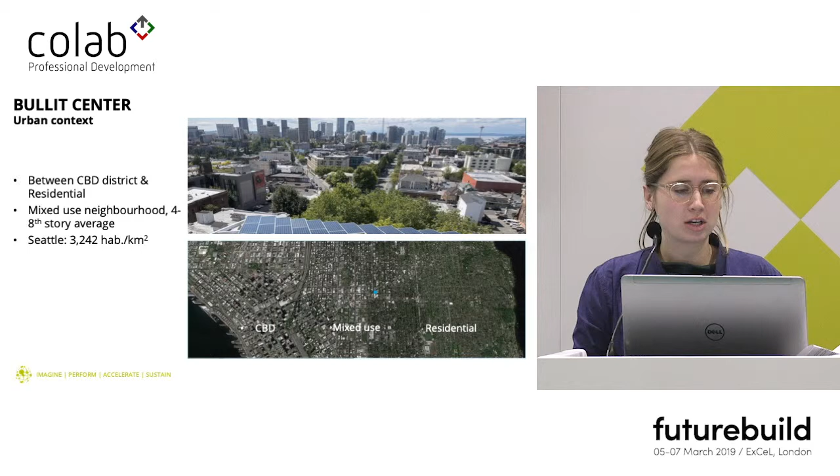Hi, I'm Louise Hamot, working at Elementa, and I'm going to talk about the Bullitt Center, which is a commercial building in Seattle, finished in 2013, and situated in the middle of Seattle in a semi-dense urban context, I would say.

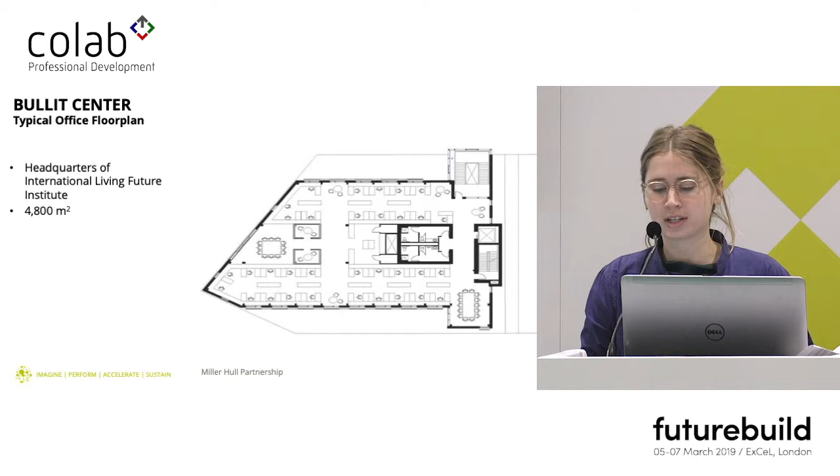It hosts the headquarters of the International Living Future Institute and other tenants. It's mostly offices, but the first 2 floors are for educational purposes concerning living buildings. It is actually full Living Building certified, said to be the greenest office building in the world, at least one of the highest living buildings.

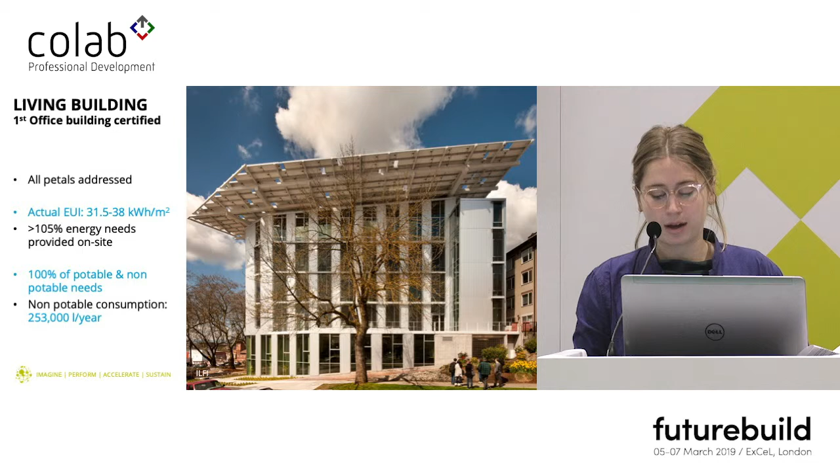And I will highlight some of the petals it addressed, and I would like to start with the fact that it's achieving net positive energy and net zero water. And you can see that actually the EUI and the water consumption for this building are pretty low. Concerning the energy use intensity, compared to an average commercial American building, it is actually 83% lower, and the actual performance is lower than the predicted one.

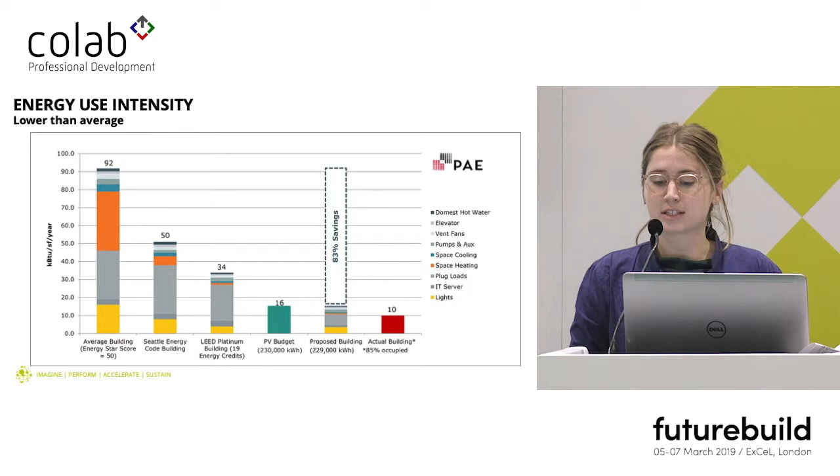This can be verified through constant monitoring, which takes place inside the building, and you can find this information on the website. And as Martin said, certification is based on actual performance and not modeling and predictions.

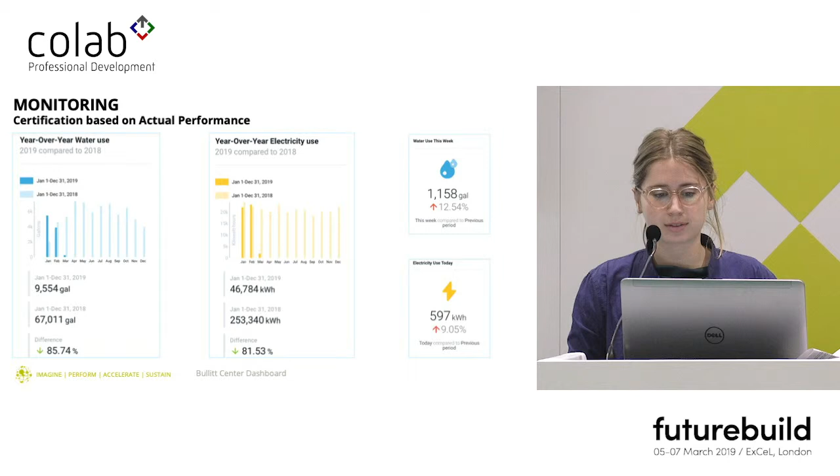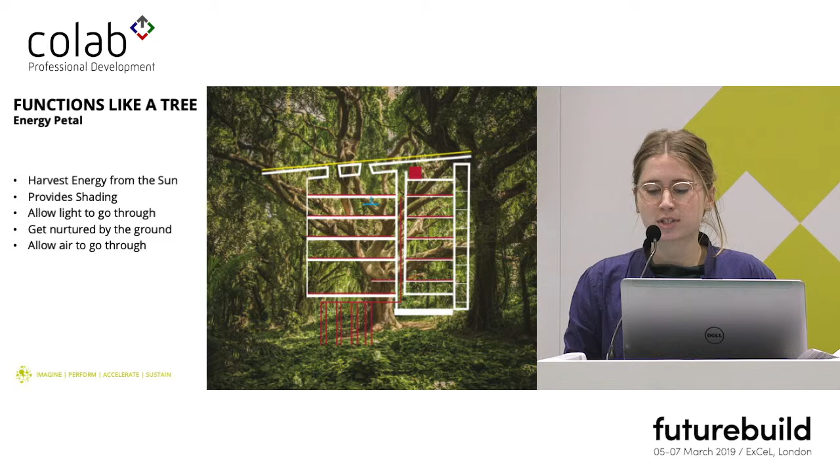So if we look at the energy petal and how the building actually achieves net positive energy as it is required, the better way to explain it is to compare it to how a tree works. Like a tree, it harvests energy from the sun through PVs, and the PVs have been laid out to maximize yield during summertime, because in the summer it gets very, very sunny, a lot more sunny than in the rest of the year, and they found out that was the biggest yield.

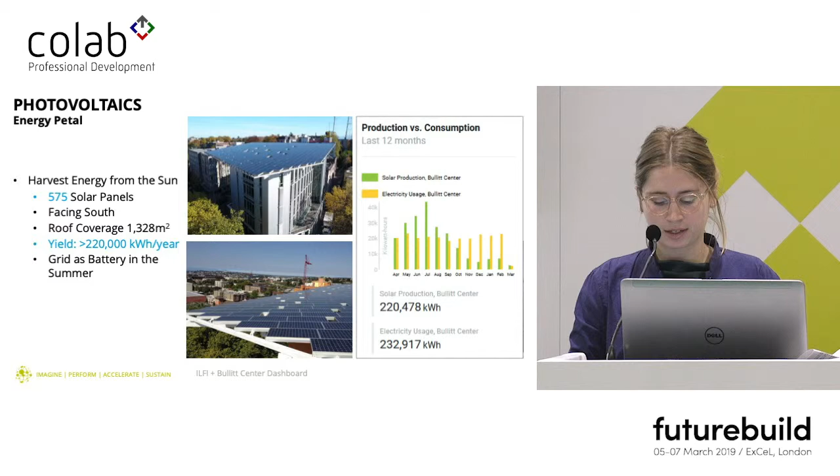And therefore the grid is used as a battery. The surplus in the summer goes into the grid, and they get it back in the winter. You can tell that the roof area creates a large canopy and exceeds the footprint, and it's something they actually had to change the building regulation for, because it was not allowed by Seattle.

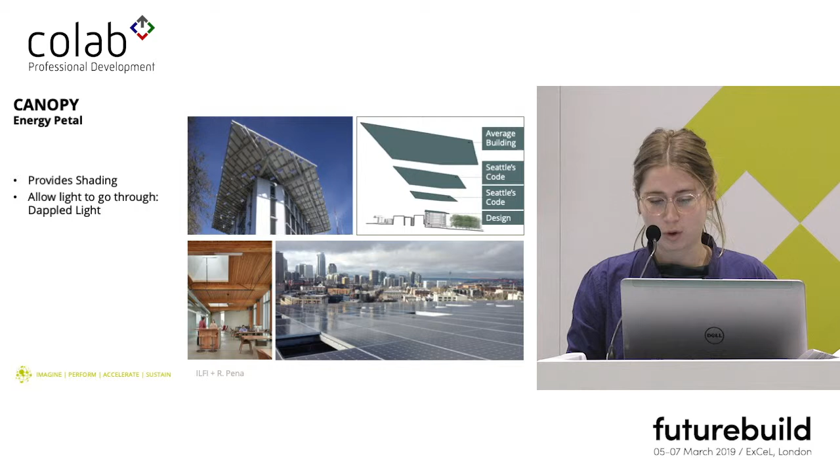And it provides shading, but also it allows light to go through a series of holes, and also inside through skylights. And you can see that if it had been an average commercial building, the roof area would have been much bigger. So it was also made possible because they reduced the overall consumption through a lot of different strategies, and I would just mention a few of them.

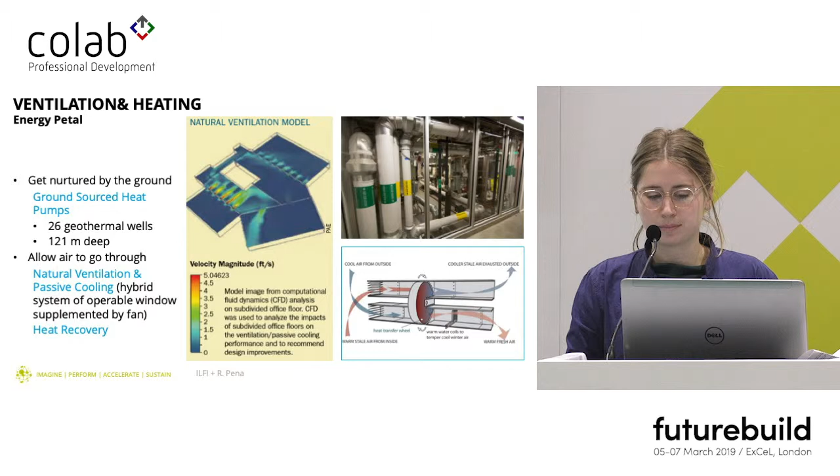So it has geothermal heating and natural ventilation and passive cooling with a system of operable windows. We can do night purge in the summers or just adapt according to the inside temperature, and there is a heat recovery system. And there is obviously good insulation and other strategies of that kind.

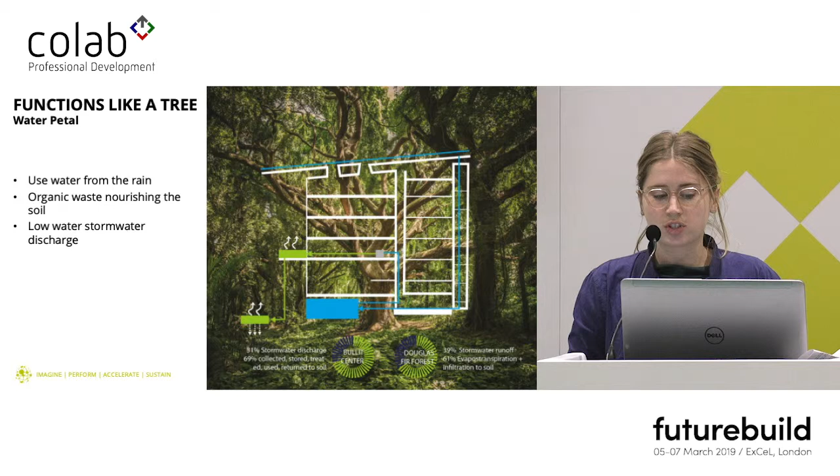Concerning the water management, maybe the best analogy is to compare it to a forest. So if you compare it to a Douglas fir forest, the proportion of stormwater discharge and water treated that goes back into the air and the soil is actually pretty similar. So 31% stormwater discharge for the Bullitt Center and 39% for a Douglas fir forest.

So it gets all its water needs from rainwater harvesting for potable and non-potable needs. The potable use is actually a recent achievement. It's allowed since November. Unfortunately, they had to use chlorine. They really fought against it, but the local authorities wouldn't let it go. But it was still a big achievement because it was not allowed at first.

And concerning non-potable water, it's harvested through the big canopy, the big roof, and it goes into a big cistern which is pretty large, but it's due to the fact that, again, in the summer it doesn't rain at all, so you have to compensate for this. And in the rest of the year it rains awfully a lot, more than in London.

And also net zero water is made possible because of low water consumption. And one of the key aspects is the toilets. It uses composting toilets, and it's the highest building with composting toilets in the world. And with this foam technology, it actually saves 96% of water, because it only uses 2 tablespoons of water mixed with a biodegradable soap.

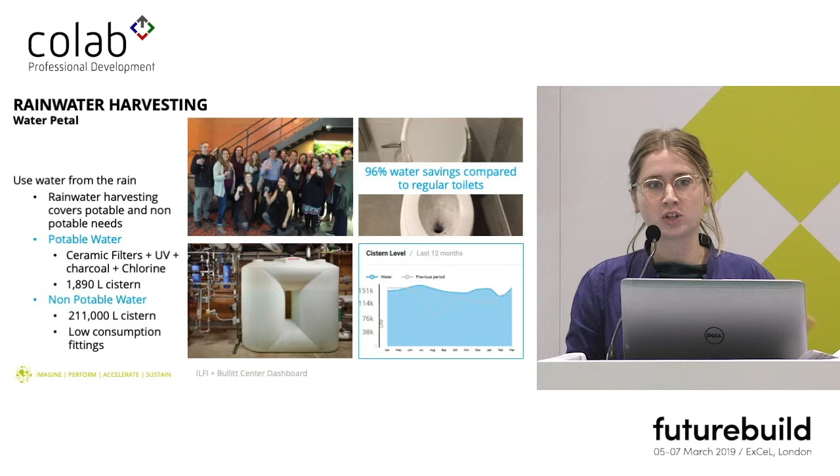Then it goes into the soil digesters that transform the black water into a fertilizer, CO2 that goes through the heat recovery, and leachate that goes to a facility.

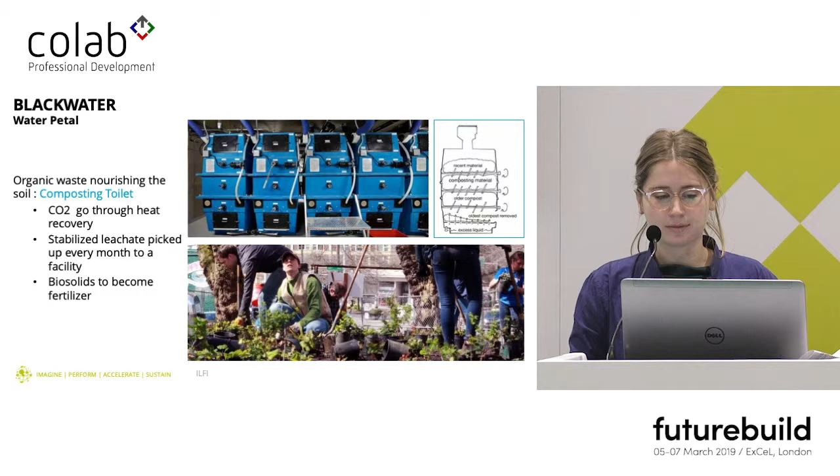And finally, concerning the grey water management, the water goes through constructed wetlands built on one of the green roofs, and it's treated through plants like horsetail, which thrive well in Seattle. And it runs several times before going to an infiltration planter in the little park we can see in front of the building. This park did not exist before.

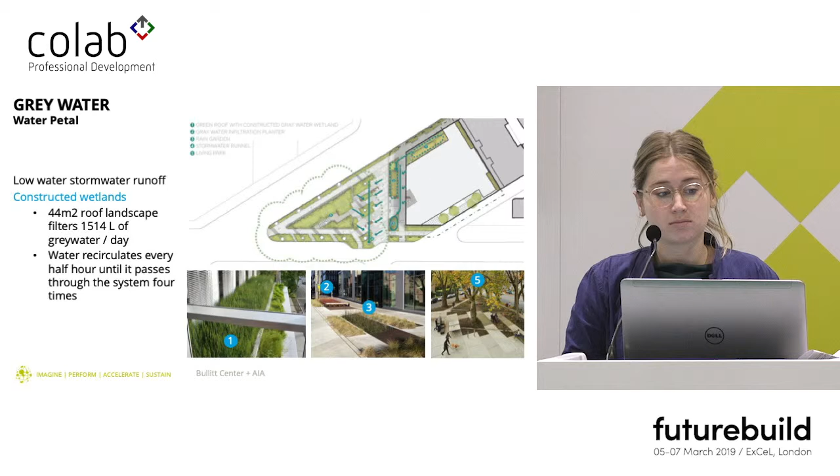It was a very dangerous road intersection, and the team managed to convince the city to change it into a public garden, and it also became part of the grey water management system.

Martin talked a bit about the healthy materials. They also had to address this, so using only Red List free materials, some salvaged wood beams. All wood is FSC certified and comes from 1,000 kilometers around. For here that seems a lot, but for the States it's pretty nice. And you can really feel inside that the materials are really healthy, and it's very pleasant actually to be inside.

And a final aspect I would like to highlight, to really show that sustainability design is not just about energy and water efficiency. One of the best places to hang out in this building is actually the staircase, because it was designed with the best view, where you have a beautiful view over the Olympics, and it was intentionally made large so people can hang out.

And also worth mentioning that there is no parking space, which in the States is not the usual trend, except in New York. And 75% of occupants are estimated to use public transport or walking.

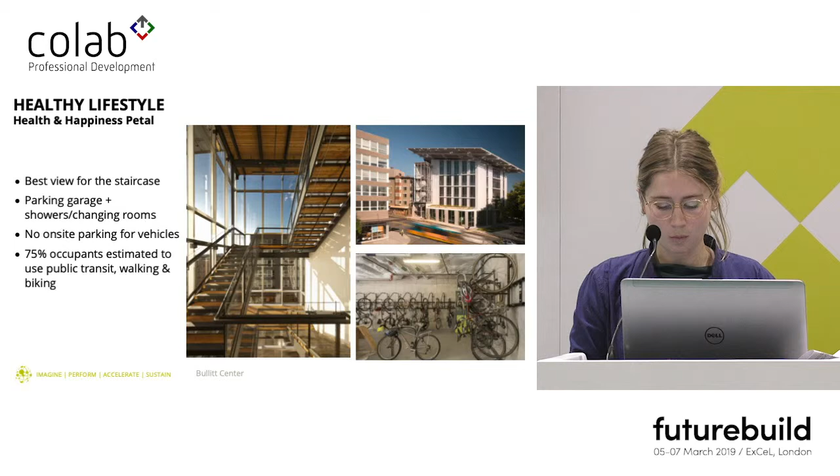So there is much we could say about this building, and if you're interested in it, there are a lot of studies out there. And the main point is to show that this type of building is achievable sustainability-wise, and they did have a lot of hurdles with building regulations, which they were able to tackle and change. And now I give the floor to Aliki, who is going to present the Bertschi School.

Hello, my name is Aliki. I'm also working in Elemental Consulting, and now I'm going to talk to you about another Living Building case study, which is an educational building type. So the Living Building Science Wing of the Bertschi School is actually a new construction in addition to the existing Bertschi School, and is the first building that pursued Living Building Challenge Version 2, and actually the first that achieved it.

The Bertschi School is located in a very dense neighborhood of Seattle, the Capitol Hill neighborhood, and the site of the Bertschi School was very tight. Therefore, they knew that every single square meter of the outdoor area really mattered for the project, and it was actually constructed in an area that was previously a paved sport court.

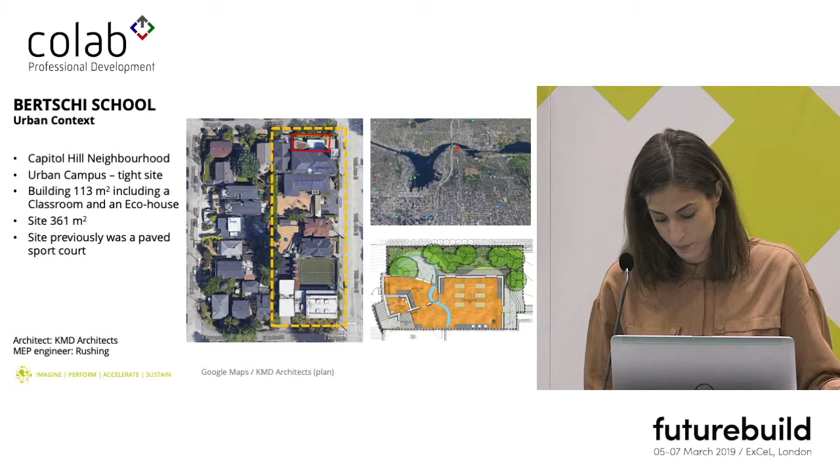As I state in the slide, the architects were KMD Architects and the MEP engineers were Rushing. But what is important is that lots of green building professionals from Seattle gathered together and formed the Restorative Design Collective, which provided all the design services pro bono for the project, and the construction services were at cost price.

And the important thing is that the design involved intensive collaboration between the staff and the students of the school. The students were asked what they would like this new classroom to look like, and they answered, I would like to have a river in the classroom, or I would like it to be a green building. And that's how all these ideas were transformed into design features that not only met the Living Building Challenge requirements, but also provided beauty in the building.

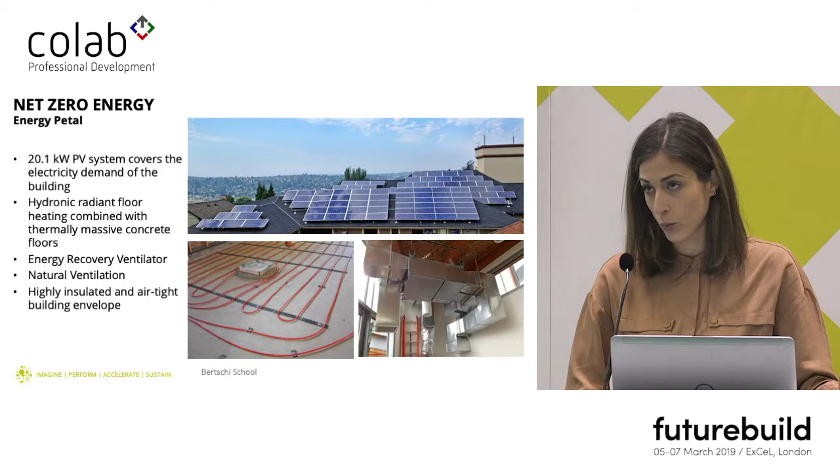In terms of petals, the building achieves net zero energy through the year. This is achieved through renewable energy generation from PVs allocated to the roofs of the adjacent church building, and energy demand reduction through a highly insulated and airtight envelope, and efficient building energy systems like hydronic underfloor heating combined with a thermally massive concrete floor, and an energy recovery ventilator that provides fresh preheated air in the classroom and dumps all the moist and CO2-rich air to the eco-house, where the green wall can benefit from it. All these are coupled with natural ventilation, which can provide some free cooling when there is temperate weather outside.

In a bit more detail, from data gathered the year that this building was certified, we can see that the energy consumption of the building through the year is approximately 150 kilowatt hours per square meter, which actually matches recent benchmarking data of the median energy use intensity value of an elementary school in the US.

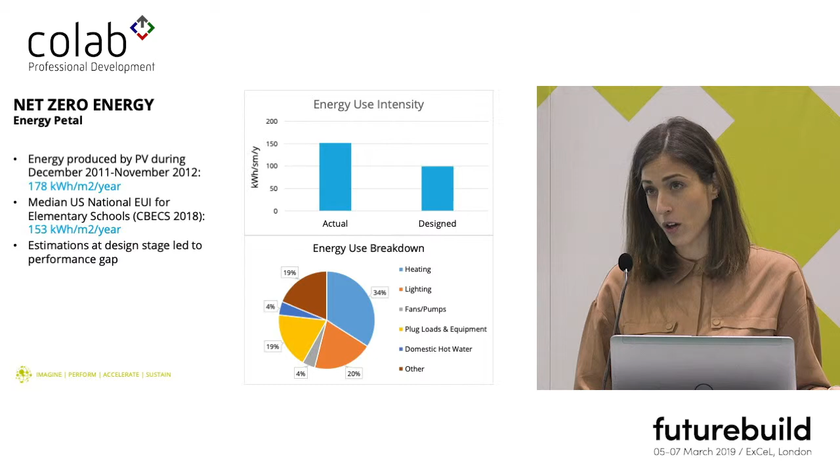We can see that compared to what it was designed to consume, there is a small performance gap, and this came out because of a lot of assumptions used during the design stage and not very accurate tools, because the type of building was not the best one for conventional thermal modeling tools, so they used a lot of manual calculations, took some data from other similar studies in Seattle, or even used manufacturers' assumptions, which led them to overestimate the efficiency of the heating system, for example.

In terms of water, the building achieves net zero water through lots of methods, such as rainwater harvesting, potable water treatment, grey water reuse, stormwater management, and black water treatment through composting toilets.

It's also calculated that the water usage of the building is actually half of what it would be in a typical same building.

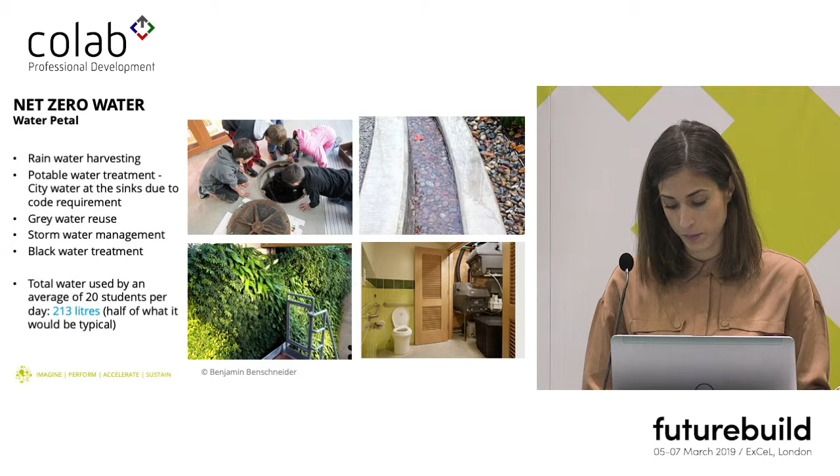In terms of rainwater harvesting, the whole cycle is visible to the students. All the hydraulic cycle can be seen by them, from the water that is collected through the butterfly-shaped roof in the building, runs through the rain leaders that are visible in the classroom, goes through the river in the floor, like a runnel that runs through the floor of the building, ends up in the potable cistern, and when this overflows, then it can be transported to the external runnel, to the rainwater garden, and to the irrigation cistern.

In terms of grey water reuse, grey water that comes out from the sinks is actually pumped to the green wall, and the plants use this water to grow and to be treated. And then with the process of evapotranspiration, they release the water as vapor, and the ventilation system releases this vapor out of the building.

Again, it is very important that the students are really aware of all this treatment and the circulation of the water, and because they know that there is a specific amount of water that the green wall can use, they take care of how much water they use from the sinks.

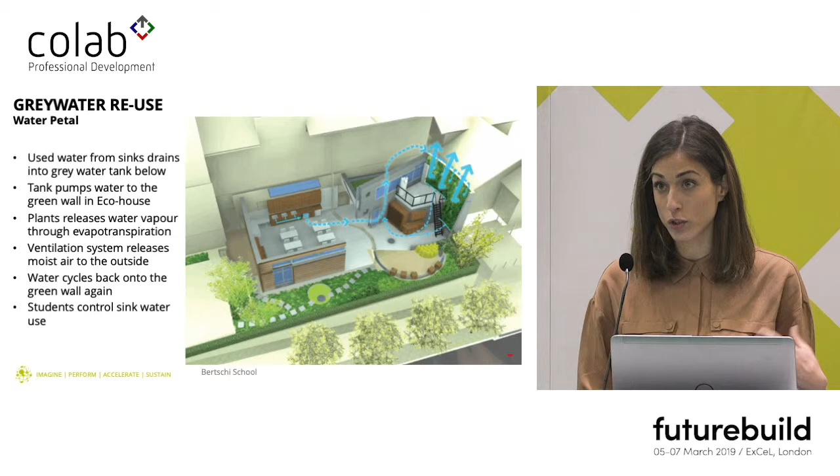A very important and major aspect of this project was also the health and well-being of the students, because students need an environment that will aid their performance and their creativity. There are lots of elements that provided health and well-being, such as daylighting provided from skylights and high windows, external views that look at the gardens of the buildings and the sky and promote connection with nature. Other biophilic design elements such as the green wall, which apart from treating the grey water also helps a lot on purifying the air.

Also a very important aspect was the materials, and as we referenced before, everything was Red List free, which is a requirement for the Living Building Challenge. Interior finishes were limited and reduced so they can limit off-gassing. And also one very interesting aspect was that there were a lot of art objects around the building that mimic nature and can provide a very pleasing environment that brings satisfaction to students' minds. Some of these objects are the runnel, some salmon cast on the floor, or some garden sculptures.

This project fits very well with the curriculum and the educational values of the Bertschi School, which promotes sustainable practices and environmental awareness. It is very important that through all these processes, kids get to learn and understand their connection to the environment and their impact on it. Some of these elements are, for example, as I said, the water flow, everything is visible. They can learn more about treatment and conservation of water. They are able to control the daylight and the natural ventilation of the building, reducing the amount of energy that they use from electric light or mechanical ventilation.